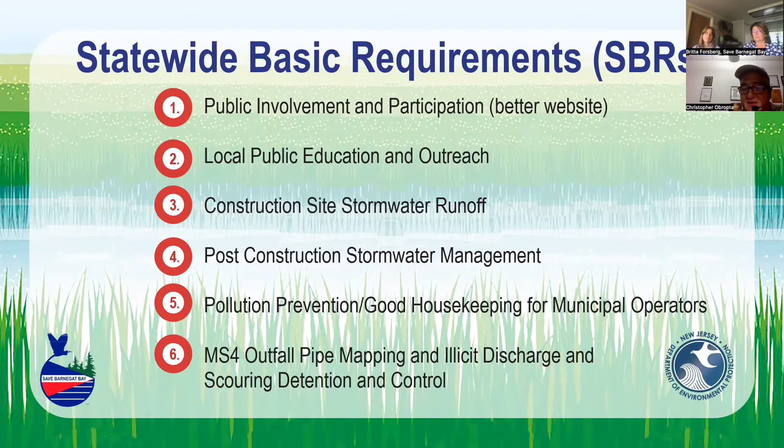These have not changed over from this year to next year. They really haven't added much to this. A lot of this stuff is pretty straightforward. We'll kind of go through some of these right now.

You're required to have a municipal stormwater webpage. This has gotten more intense basically with the new regulations that are coming out in January. They're looking for a dedicated webpage, and they have templates available from the department.

They want all these items posted on the webpage. You now have to post your MS4 infrastructure map, which is being required to be developed as part of the new permit that comes out in January, and this new thing called a Watershed Improvement Plan, which we'll talk a little bit about.

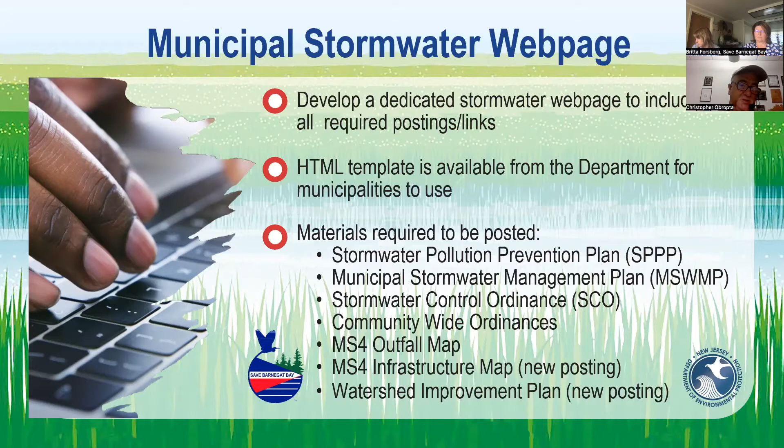So a lot of towns have a website, a web page attached to their municipal site, and it really just kind of talks about stormwater pollution. Now they want you to have posted clearly all these materials so they're easy to find. So that's really the public involvement and participation piece and public outreach piece.

The second piece here is public outreach and education, and this is interesting.

Most towns have a place that makes signs for them. We have Rutgers, and we have a web page with all examples of signs, so you can grab one of those PDFs, send it to the printer, and have it made. Pretty easy to do. Other things in this general public outreach category include billboard signage and murals, like people painting on the sides of buildings focused on stormwater. Then there's stormwater facility signage, not just for green infrastructure, but for your detention basins and other things you may have.

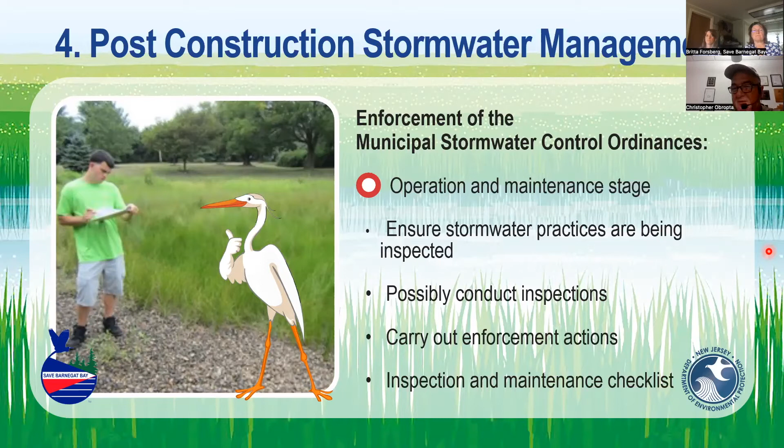So that's pretty straightforward. We have pollution prevention good housekeeping work, which focuses on what we do as a town. We have to pass existing ordinances and new ones, like a private salt storage ordinance. So if you're a homeowners association or a mall with your own salt pile, you have to show it's being stored properly so the salt isn't released into the environment. Then there's the tree removal replacement ordinance.

Towns are required to put in a tree ordinance if they don't have one. So if trees are cut down, you're required to replace them, and you need permission to remove them. These ordinances will be in the January 2023 permit requirement. DEP will have samples of these ordinances that you can download and adopt, or tailor for your own town.

A yard waste collection program has been in effect for a while. We've done a pretty good job of this as a town, really trying to make sure these leaves do not get into the river or the bay - trying to keep them at least 10 feet away from the inlets so you have a chance to clean them up before they wash in.

We also have pollution prevention good housekeeping measures for street sweeping - there's going to be a stronger requirement as we move forward next year. Catch basin and storm drain inlet inspection and cleaning has changed a bit too. Then there's inlet retrofit, which is putting a grate in front of the inlet so water bottles don't get in.

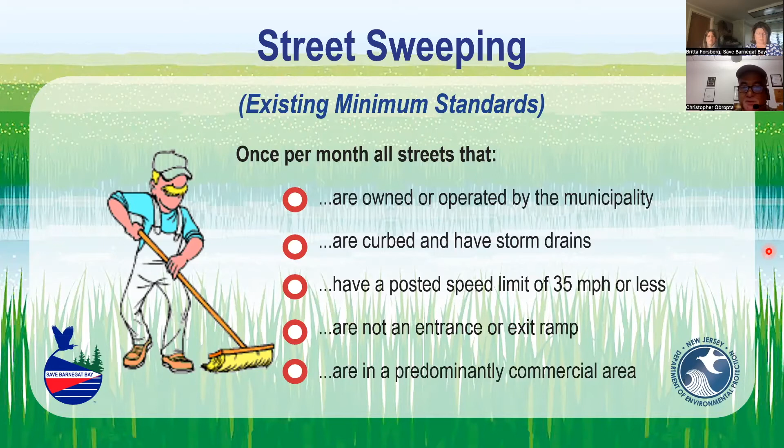A lot of you in towns have been doing a lot of street sweeping. I'm not sure if you even know these were the requirements, but these are what were required in the existing permit. Here's how they change effective January 1st.

There's triannual street sweeping now, so every 4 months instead of monthly, for street segments of municipal roads that have storm drain inlets discharging to surface waters. No criteria related to speed limits, commercial areas, exit or entrance ramps, or curbs. So basically you've got to do everything now, but just once every 4 months instead of monthly.

So annual sweeping every year for street segments of municipal roads that do not have storm drain inlets discharging to surface water. I'm not sure what roads those would be - most roads have inlets that ultimately discharge to surface waters, but you may have some that don't. Those you have to do once a year.

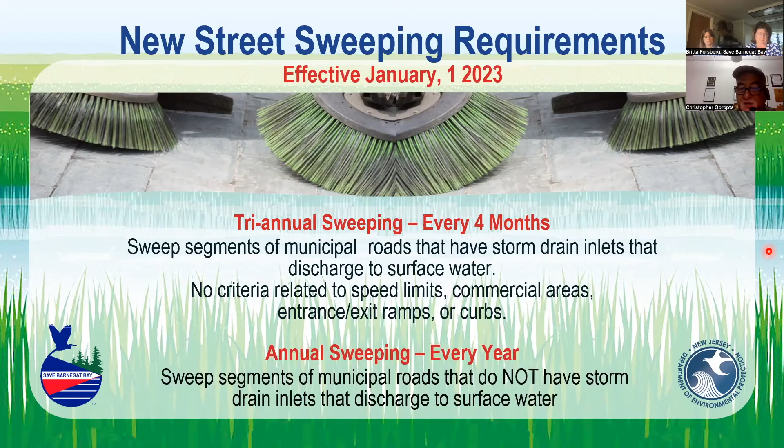Everything has a measurable goal with DEP. So the data you're supposed to be collecting - if you're the stormwater coordinator, this is important because you have to submit it every May with your submittal package showing you're complying with the regulations. That's data on area swept, number of miles of street swept, and amount of debris collected in tons. You have to quantify this, come up with a way to record it, and keep the records. This has always kind of been in effect, but I don't think many people have paid much attention to it - now we're getting pretty serious about it over the next permit cycle.

So catch basin and storm drain inlet inspection and cleaning - here's how DEP defines an inlet. The inlet is the grate in the road, on top of the catch basin. The catch basin is the concrete structure, the vault under the grate, where the stormwater goes after it passes through the grate.

So that's what they're talking about here. Inspect each catch basin and inlet at least once every 5 years.

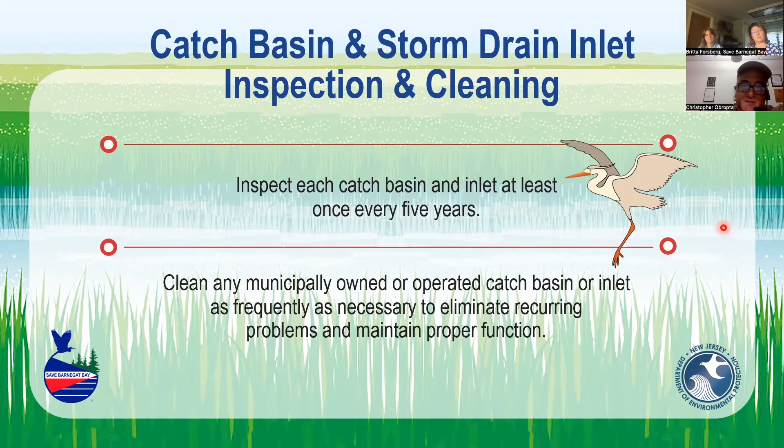So things tend to break on these a lot, so you have to be very careful about that. This is kind of the new regulation. So every storm drain inlet, so that's the grate on top, has to be inspected every year. A lot of that's just driving around and checking, what does it look like? Is it still there? Is it clogged?

If it's clogged, then obviously you have to go back and clean it out. Catch basins, if you have less than 1,000, you have to inspect them each year and clean the ones that have to be cleaned. Typically, if the catch basin has a third of it filled with sediment, you have to clean it out. If you have more than 1,000 catch basins, you have to do 20% of the total every year.

So I'm dealing with a town that has 10,000 catch basins. Every year they have to inspect 2,000 of them and clean the ones that need to be cleaned.

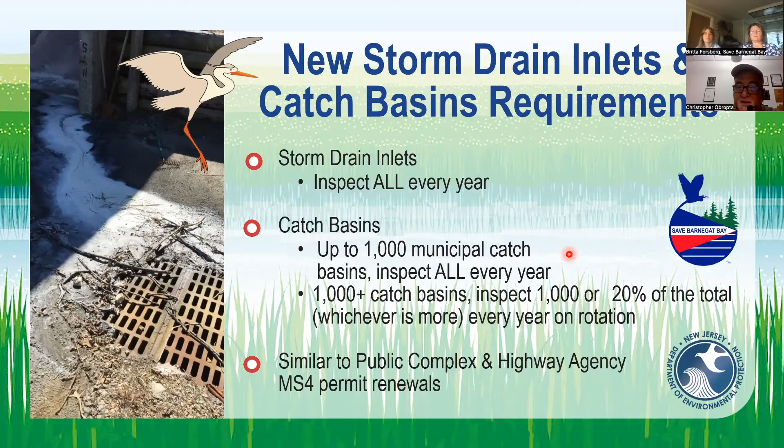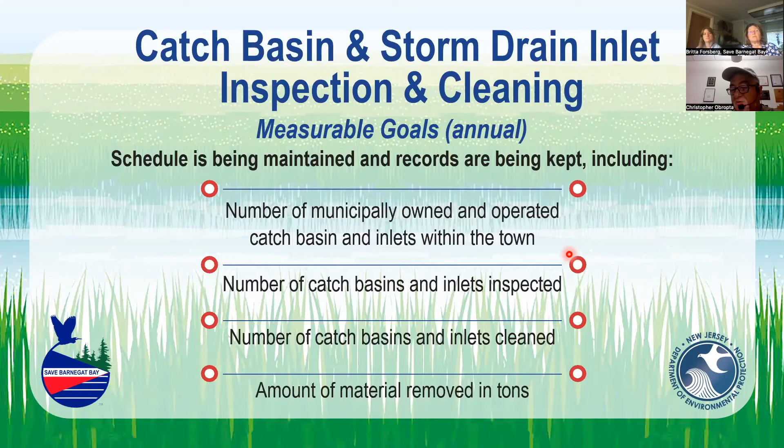Once again, keeping records is very important. How many inlets were inspected, how many catch basins were inspected, how many were cleaned, how much material was removed in tons. Once again, all this has to be recorded.

So the other thing they have in here is they're asking you to increase the frequency in problem areas. We find a lot of times that we go down a road and there's 5 or 6 catch basins on the east side of the road, and they all flow together. Water goes into one, it goes down to the next one, next one, next one. And the last 2 in the line are usually the worst in the system, so those usually get clogged the most and have to be cleaned out the most. So maybe you're doing those more often than the other 3. This allows you to do that under this permit.

Okay, perform inspections after major storms. Passing an ordinance to require private entities to maintain storm facilities and take over private facilities. So, here's the option in the towns. Every single catch basin has to be inspected and cleaned on a regular basis.

Now, there's catch basins at the mall that you don't own. There's catch basins maybe in a private housing development that you don't own. You have to ensure that those are also being cleaned and inspected. You do that by passing an ordinance. The other way is to take over those private facilities and have the township or municipality take over ownership and take care of those.

So those are really your 2 options. I would imagine the second option is probably not one that a lot of people want to do. It's much easier to pass an ordinance and require the homeowner association or the mall to submit an annual report saying that they've been cleaned and inspected.

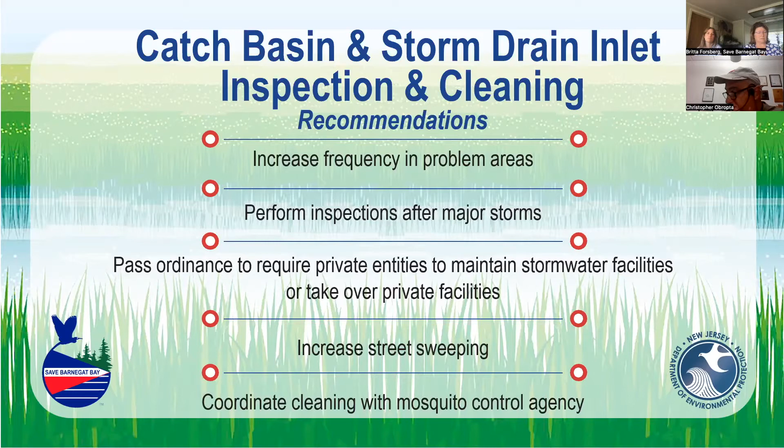The other thing they have on here is coordinate with the mosquito control agency. They're doing a lot of work anyway to make sure there's no standing water in some of these basins that breed mosquitoes, so maybe there's a way to work more closely with them. Remember, they're a county agency in most cases, so it might be hard for 30 some municipalities in Ocean County to coordinate with them, but it may be worthwhile looking into. They may have assistance.

The other thing is to retrofit these inlets. I don't know where I stole this picture from, but I'd like it. I think it might actually be from DEP's presentation. So municipalities shall retrofit existing inlets that are in direct contact with repaving, repair, excluding pothole repair, resurfacing, or in direct contact with any reconstruction or alteration facilities. So that's the existing standard.

So where the raccoons' heads are sticking out, you're supposed to put a steel bar in front of that, so water bottles and soda bottles can't get into there. And that was what the main retrofit was. And you only had to do it when you were repaving or repairing a road, resurfacing a road.

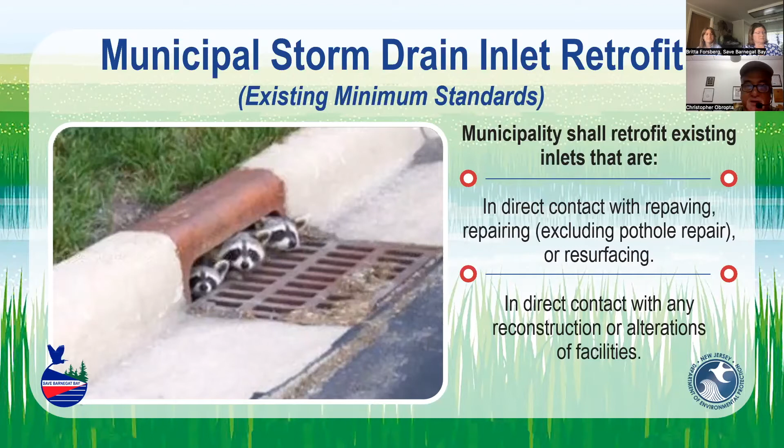So you didn't have to go around systematically replacing them until January 1st of 2023. Now you have to do that. So you have to go in, change this lid out and replace it so water bottles can't get in there. And you have to do that for every single storm drain you have in a town.

Okay, so you can bolt it on. There's a bar you can get here and just bolt on the bar, or you can just replace the grate. And then they have to be with the DOT bicycle safety grates, so that when a bicycle drives over this, the person doesn't go over the handlebars, get caught. That's part of the requirement.

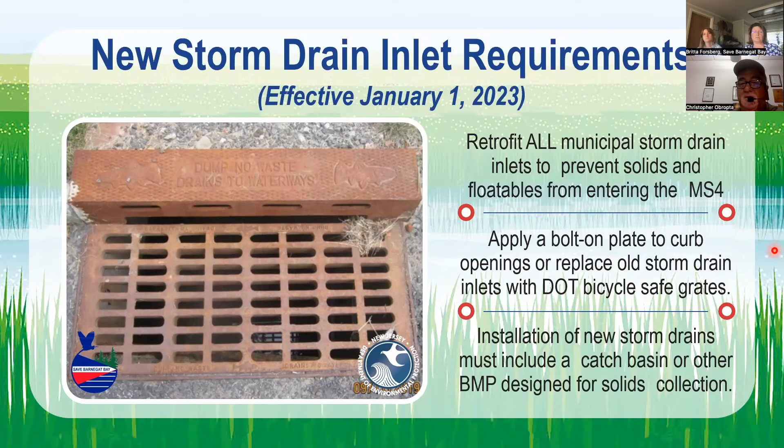So this is all kind of spelled out in the new permit. So this could be a huge expense for the town. Okay, so something to kind of think about as you're budgeting for the next few years.

The other thing is, they want you also to make sure that you identify all your stormwater conveyance features, your ditches and pipes, and inspect, clean, and maintain them as needed. So this is new, you start thinking about inspecting all your stormwater pipes. That could be very expensive too. And cleaning them even more expensive, right? So these are things that you'll see coming out in a new permit.

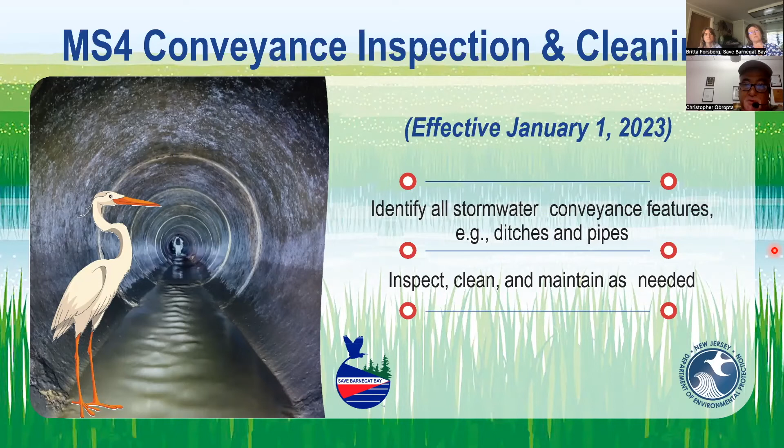Good housekeeping procedures. This is the fifth of the stormwater pollution prevention mandatory requirements. So we talk a lot about the maintenance yard. This is a place that typically when DEP comes out and does their audits, they will inspect the maintenance yard. They want to make sure your fueling operations are up to code.

You have a secondary containment for any time there might be a fuel spill or diesel spill. The vehicle maintenance is being done inside a garage and not out in the open, so any kind of oil or fuel that might be leaking from the vehicles is contained. And then the on-site equipment washing is in a contained area, so you're not washing oil and mud and grease off vehicles that's going into the storm sewer.

Once again, salt and de-icing material storage - everybody probably has that in place already. Aggregate material, construction debris storage - a lot of folks have this in place already, whether it's in a walled-in area with a tarp on it, or just a walled-in area that won't allow it to wash away.

Street sweeping and catch basin clean out, other material storage. A lot of folks are just putting this in dumpsters and then hauling it away. So where you keep that is important, because you don't want that washing away from the yard into some other place.

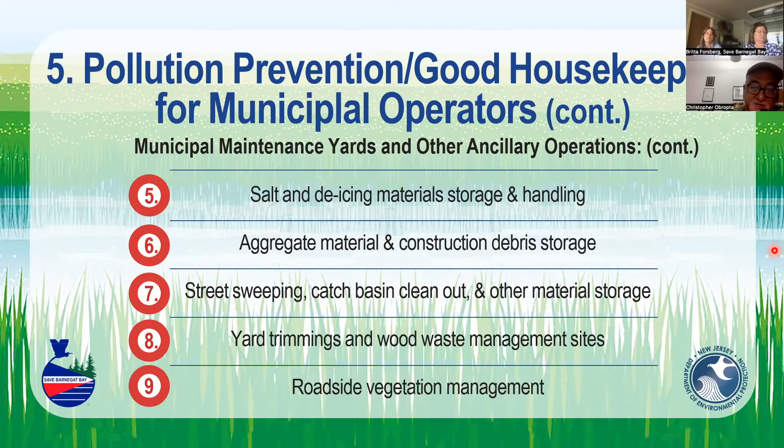And yard trimmings and wood waste management sites and roadside vegetation management. So these are things that we worry about. We'll talk a little bit more about some of these.

So fueling operations, minimum standards kind of here. I had in here, I actually was looking at Woodbridge's pollution prevention plan, and they have that they inspect all fueling areas on a monthly basis. I think that's a great idea to put that in there, and that could be like a 2-minute inspection, walking around, everything looks good, write it down. It was inspected the first of the month by so-and-so, and we did our monthly inspection, right?

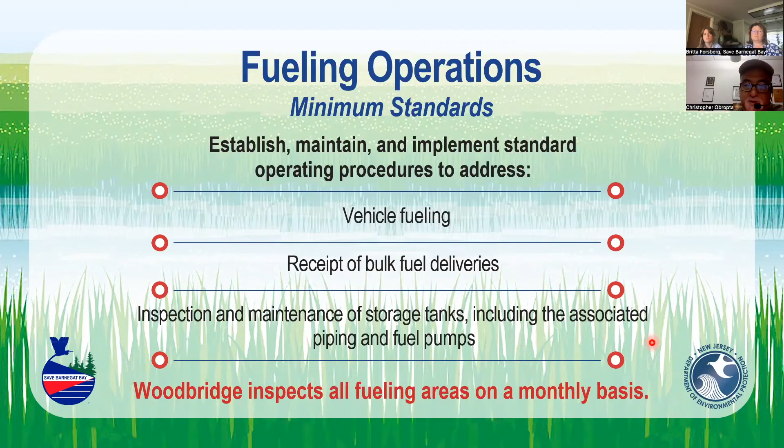Receipts of bulk fuel deliveries is important to have, so what's on site, and inspection and maintenance of storage tanks, including associated piping and fuel pumps. So when you're inspecting, you really want to make sure that the tanks aren't leaking. Most of the times you're using this stuff on a daily basis. If there's a problem, you report the problem, you fix it. But DEP wants some sort of documentation that you're doing regular inspections of this, right?

Secondary containment they want you to have. So in case something breaks, a diesel tank breaks, where's that diesel going to go? So you need a secondary containment area for that. Any discharge in that secondary containment area, you have to make sure that there's valves in place so it doesn't get discharged into the environment. So this is all pretty standard procedures that you probably all have in place already.

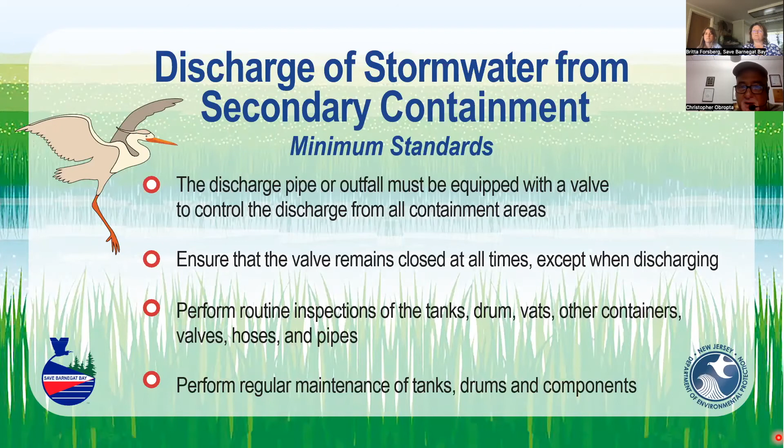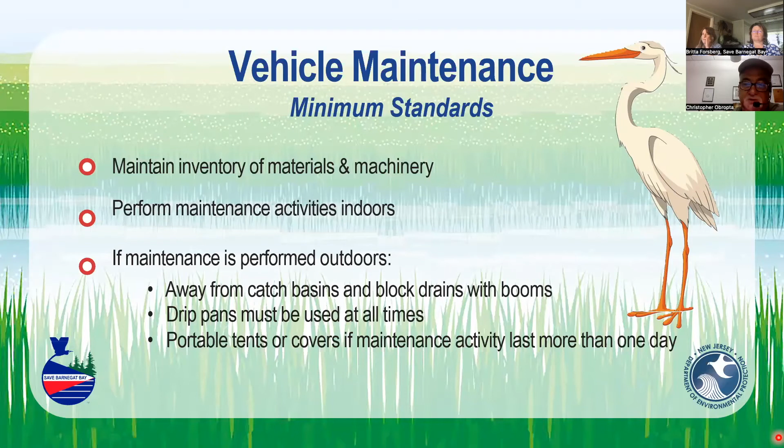So really, if you're working outside trying to fix the vehicles, they want to make sure that there's no impact to the environment. That's pretty easy to do.

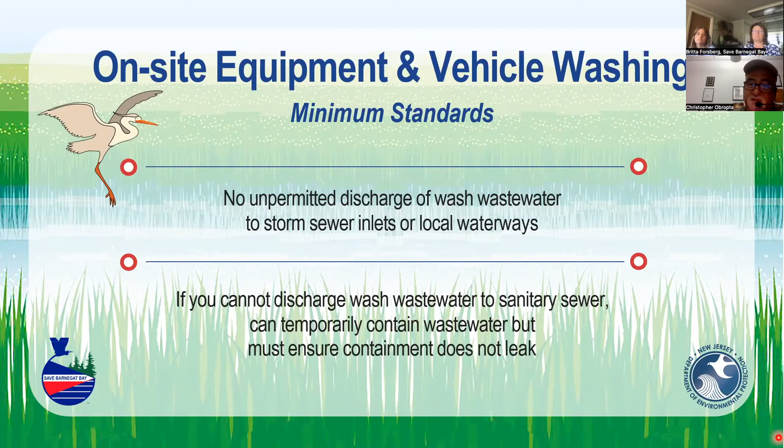Okay, salt and de-icing materials. This is a big problem that we've had for a long time in New Jersey, one that I think we've done a great job of managing by building salt sheds to make sure the salt is not washed away. The bigger issue is when we're using the salt in a storm, making sure we're cleaning up after it and sweeping the salt back into the salt shed, not letting it get away.

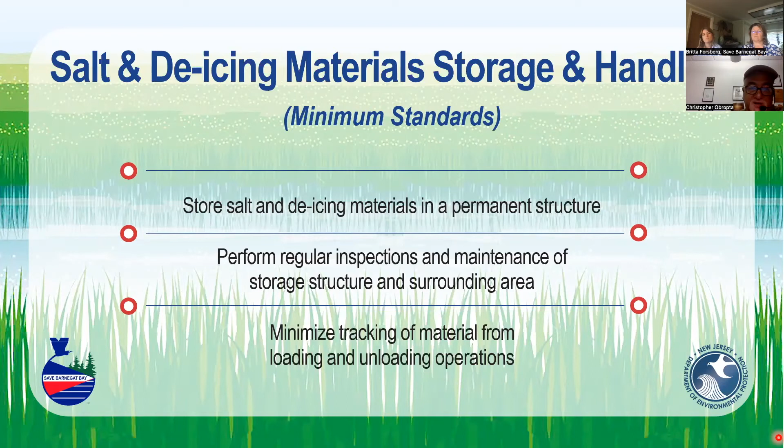I don't know how many of you guys are going to be able to do that, but keep in mind your guys were just out for 48 hours without sleeping, plowing and salting, and now you need to go out within the next couple of days and clean up those salt piles. So this is going to involve a lot of overtime, time and a half. And we know in New Jersey it only snows on Sundays on a holiday, so it's triple time or something like that.

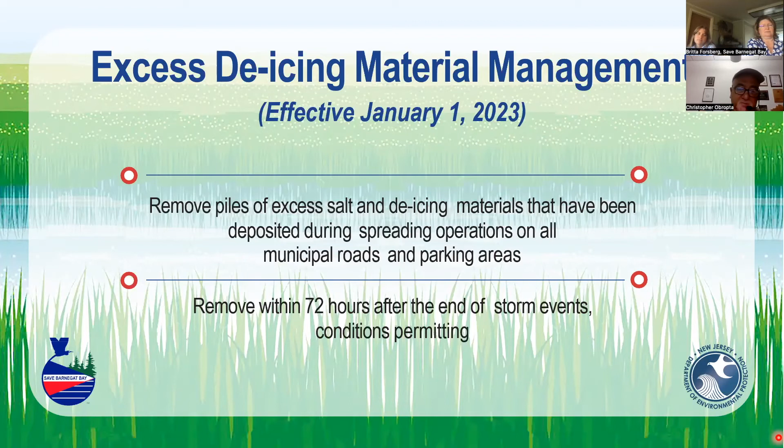So anyway, you have to be worried about this. This is something they had in the original permit 5 years ago, and they pulled it out. Now it's back once again in this new round of permitting. And more on this stuff.

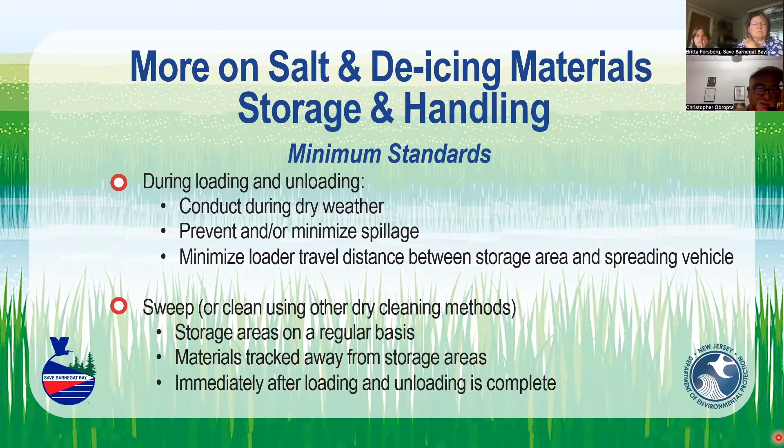During loading and unloading, conducted during dry weather: prevent and minimize spillage, minimize loader travel between storage area and spreading vehicle, sweep up debris from storage areas immediately after loading and unloading is completed. So really trying to keep the salt where it's supposed to be and not let it out into the environment. Reuse or properly discard materials collected during cleanup.

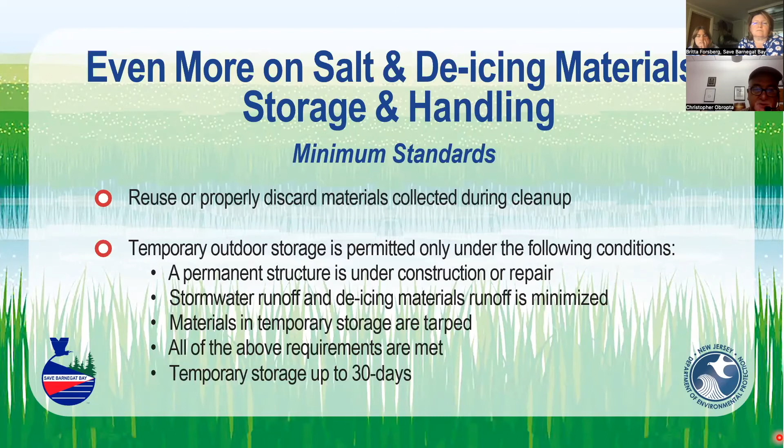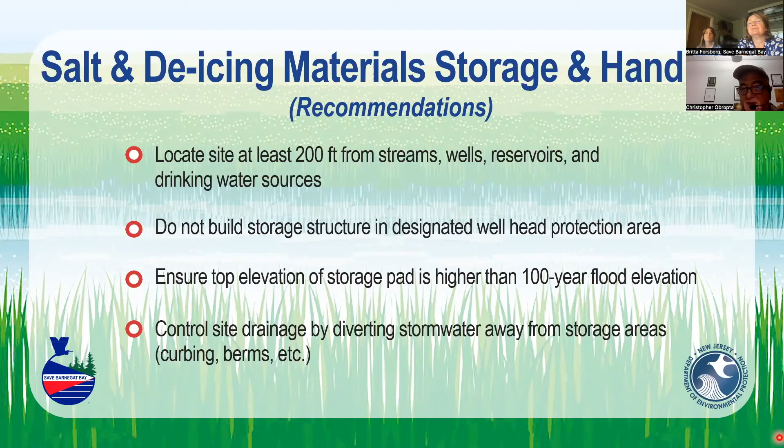My experience with shared services, it's very difficult to do. Some towns do a great job of it. Other towns really would rather just manage things on their own.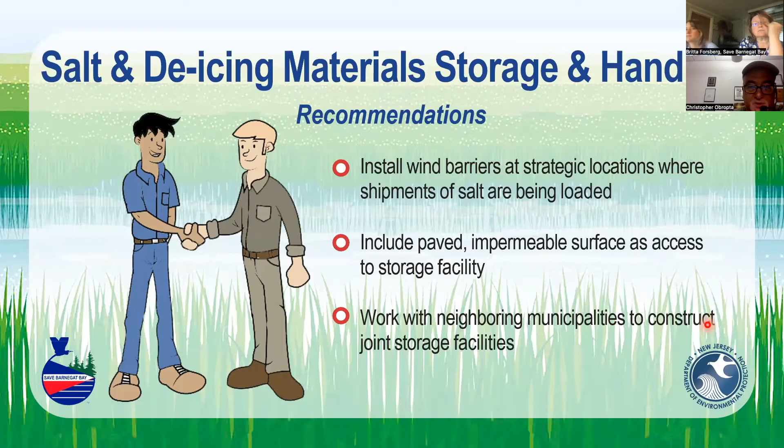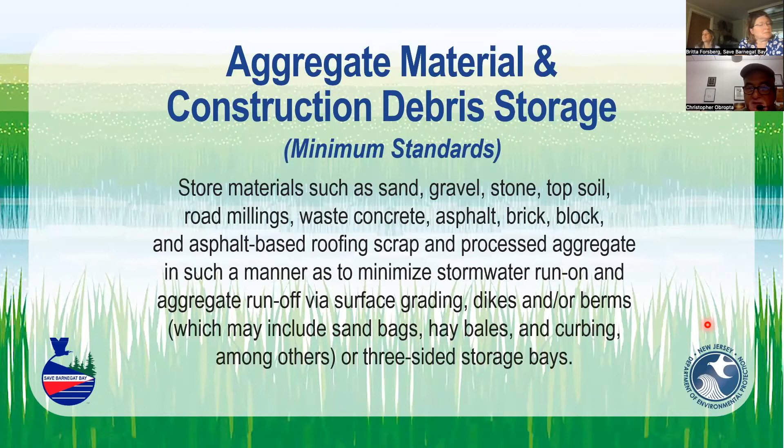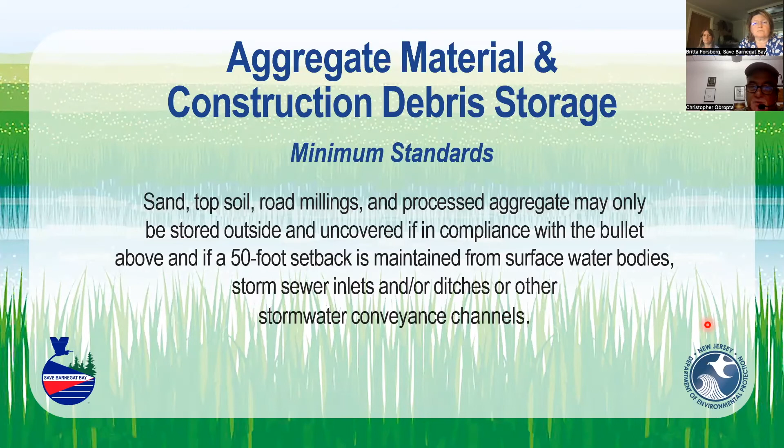Then we have some similar things for aggregate and construction debris—once again, storing it so it doesn't get off site. We have some minimum standards: sand, topsoil, road millings, at least 50 feet from water bodies, or stormwater inlets or ditches. So this is pretty important.

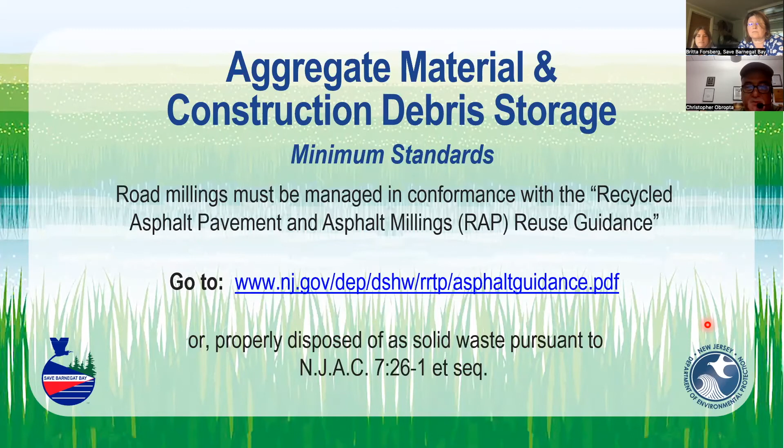And they have some other stuff in here about millings and guidance on that. I think we'll make this presentation available to you guys after this—it'll be on the website along with this recording. So once again, this is more about aggregate storage, and they talk a little bit about what DEP wants.

When we clean out the catch basins or do street sweeping, we must dispose of this appropriately. There's guidance for that, and you need to make sure you're complying with it. Road cleanup materials must be stored in leak-proof containers or on an impervious, bermed surface to control leachate or litter, and removed for disposal within 6 months of placement into storage. So you can store catch basin cleanings or street sweepings on site for up to 6 months before you have to haul it away.

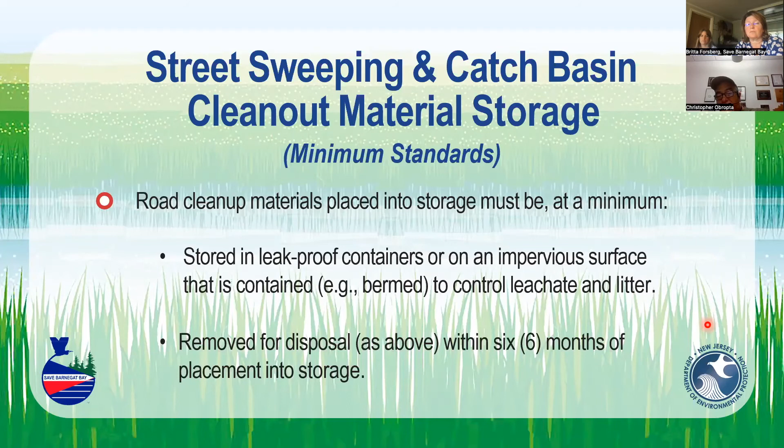A lot of guys just dump it into a dumpster and then have the dumpster hauled away. That's another added expense for the municipality, right?

Yard trimmings and wood waste management sites. A lot of people have to keep yard trimmings in their DPW yards. A lot of towns have a common recycling place where they take things. So you just have to be careful about what you're doing when you're storing it in your yard.

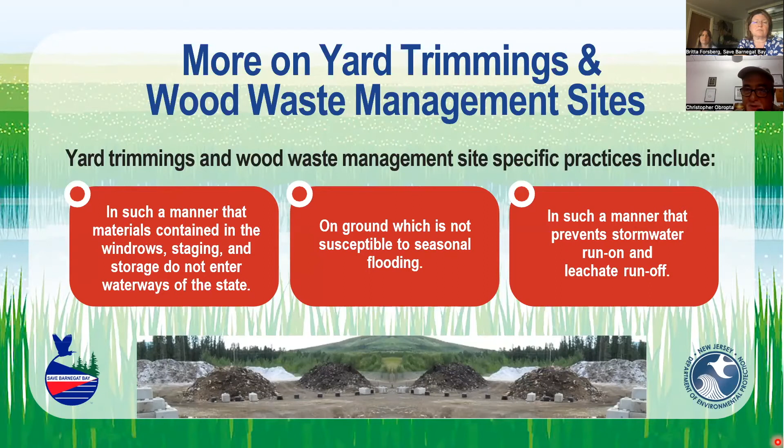It talks a little bit about composting it. You can't put it in a floodplain, and you want to prevent stormwater from running off of it or into the piles, preventing on-site storm drain inlets from siltation using controls such as hay bales, silt fence, and fabric. So if that stuff is being stored in a yard and there are inlets around it, you need to put inlet protection around it, so if stuff does wash near that inlet, it doesn't get in. But if you're smart, you're berming around it, so you don't have to worry too much about that.

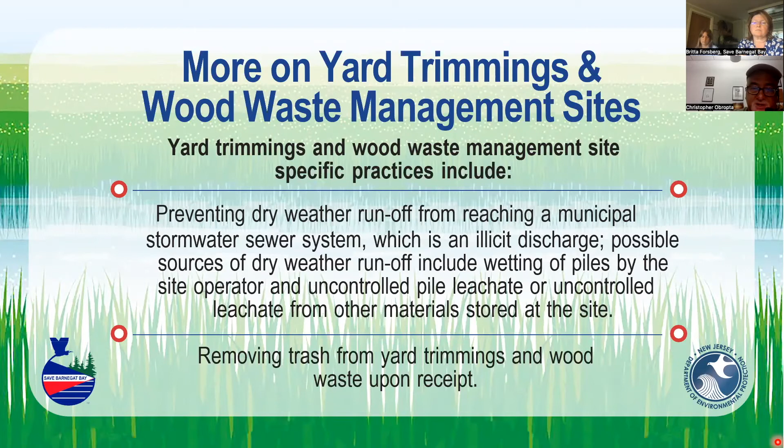Preventing dry weather runoff from reaching a municipal storm sewer, which is an illicit discharge. In other words, as this stuff is decomposing, it's leaching out liquid, and you want to make sure that leachate doesn't get into the stormwater system. And removing trash from yard trimmings and waste upon receipt, monitoring the site for trash on a routine basis, storing trash in leak-proof containers or on impervious surfaces, disposing of collected trash, and making sure that doesn't get out into the environment.

So roadside vegetation management, this is something they've changed a little bit. You weren't allowed to apply herbicides on or adjacent to stormwater inlets, on steep sloping ground, along curb lines, or along unobstructed shoulders. Municipalities may only apply herbicides within a 2-foot radius of surrounding structures where overgrowth is present.

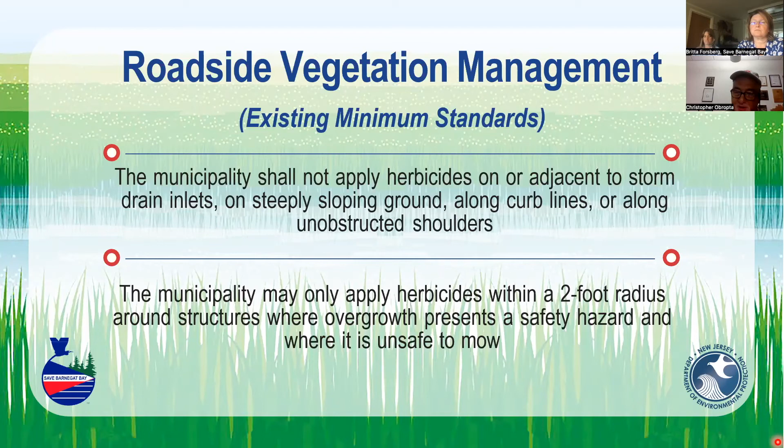A lot of towns will drive down the road with their DPW truck, and the guy will hang out the window and spray the vegetation around the guardrail. So this is kind of what we're talking about here. The new restrictions start January 1st: application of herbicides to prevent them from being washed into waters of the state, and to prevent erosion by devegetation.

So this is previous the roadside vegetation management. You have to be more careful to make sure, one, you're not spraying chemicals anywhere near waterways or inlets, and two, when you're killing the vegetation, you're not creating an erosion problem that's going to cause sediment to wash into the waterways.

So stormwater maintenance facilities, this is a big thing we've been worried about the past couple of years. Anything owned and operated by the town must be inspected annually and ensured it's working properly. Anything privately owned, by a homeowner association or one of the malls or things like that, also has to be inspected annually, and you as a township must certify that they were inspected.

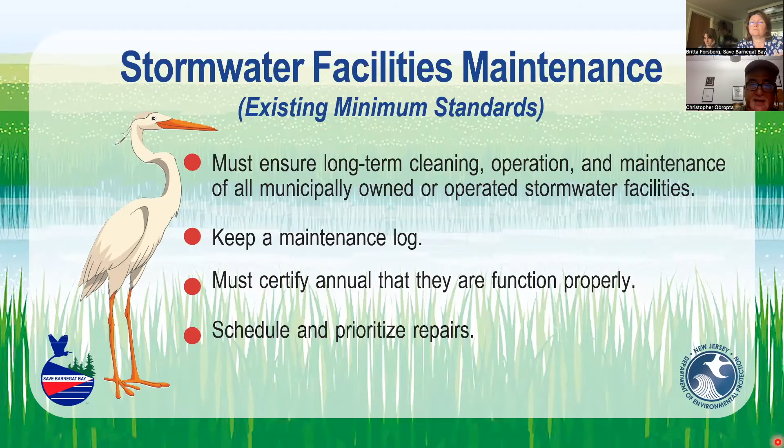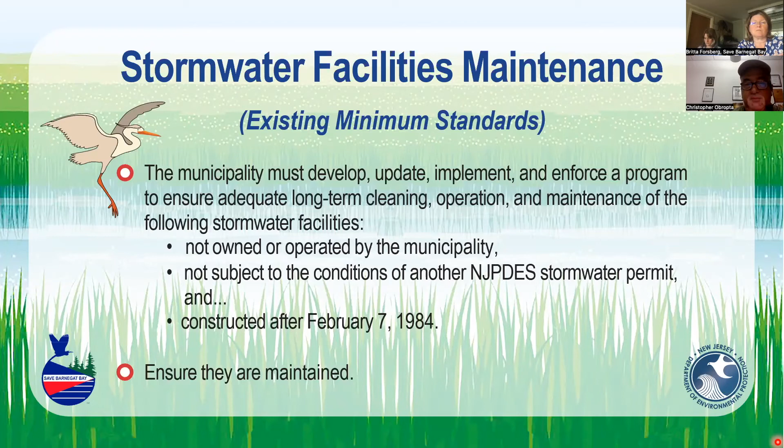Most people pass an ordinance requiring those places to have a stormwater engineer inspect their facility and file a report annually. That usually costs the homeowner association anywhere from $400 to about $700, from what I've seen. So it is an expense on their part, but they have to do it. If they don't, you as a township could issue fines to make sure that happens. You have to ensure that they're being maintained. The new regulations identify any MS4 infrastructure that does not already have a specific permit condition.

For example, stormwater management basins, inspect at least 4 times annually and clean and maintain as necessary.

Now there's a caveat to this. If your stormwater basin has a maintenance plan, and that maintenance plan has something different than an annual inspection of 4 times a year, maybe your plan says inspect once a year, you're supposed to follow what's in the approved maintenance plan. So if you have a stormwater detention basin in your town with a maintenance plan that says inspect annually, then you inspect it annually as per the maintenance plan. If you don't have a maintenance plan, then you're required to inspect it 4 times a year and clean and maintain it as necessary.

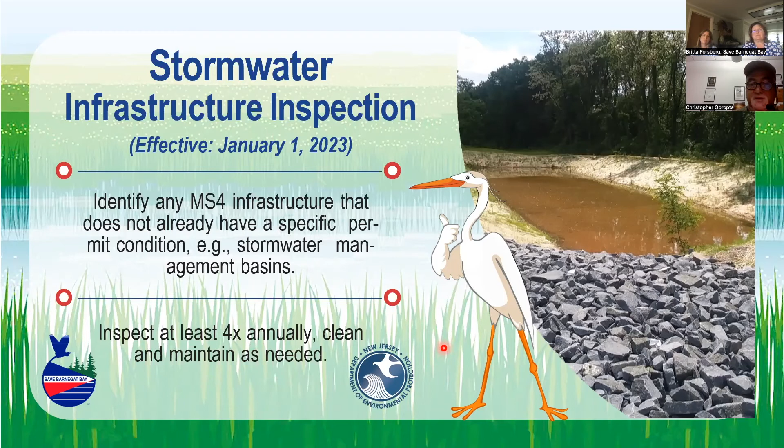So for me, that would make me want to write maintenance plans for all my stormwater infrastructure. That's one way to do this. Maybe some of these do need to be inspected more than once a year, but certainly something to think about. All these facilities should have a maintenance plan anyway. A lot of them don't because they were built a long time ago, but it might be worthwhile going in and creating maintenance plans specifically for each facility.

Ones that are not owned and operated by the towns still have to also be inspected and maintained. One way to do that is to pass an ordinance and make private homeowners associations do that.

Problem is, some of these basins are on individual properties. When we did this, back when I was part of a consulting company in the 80s, what we wound up doing was have a 2-acre lot instead of a 1-acre lot, so the homeowner would get the 2-acre lot with all this open space attached to it, which was the detention basin. Now that homeowner is responsible for maintaining that detention basin, and they're not too happy about it. So that's something to be a little bit aware of, you'll see pushback from that.

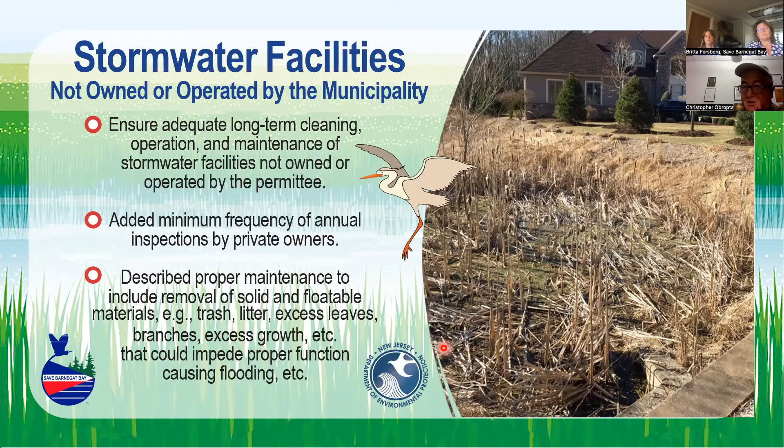So Woodbridge uses their public works department to do roadside erosion control. I talked to him a little bit about this, and I like this procedure. You're supposed to identify if there's any roadside erosion along the road, and you need to do these regular inspections.

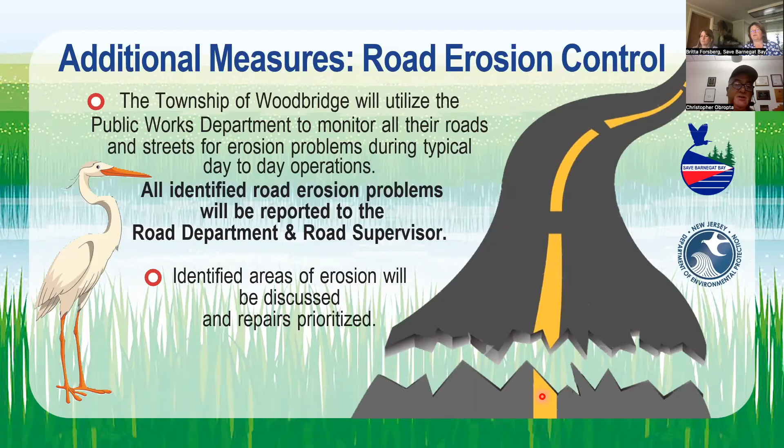Now, one way to do that is to simply train your public works guys on what to look for, and then when they're out there on their day-to-day work, if they see something, they report it. You record it and put it in a report, then schedule time to go back and inspect it and maybe make repairs if necessary. This is a way to avoid having a whole other inspection routine, which is something to try to avoid.

So here they want you to check the shoulders, the embankments, ditches, and like I said, this can be done in tandem with other municipal inspections.

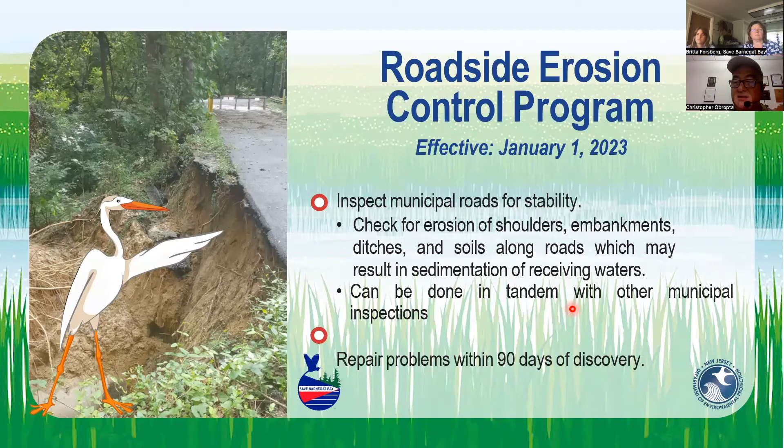I don't like this last bullet, repair problems within 90 days of discovery. That might be hard in some cases, you may need an emergency permit from DEP to make the repair. But the goal is to try to get it fixed quickly. If you can't get it done in 90 days, then you probably should have a report of why you couldn't get it done in 90 days.

Employee training. This really hasn't changed much. You need to be trained. Employees should be trained on best management practices. The municipal boards and governing boards should be trained, so your planning board, zoning board, board of adjustments, township committee, and environmental commission should all be trained on stormwater issues. Anybody who's reviewing designs has to have special training for that and be certified to do so.

Stream scouring. This has always been part of the regulations. Inspect the outfall once every 5 years.

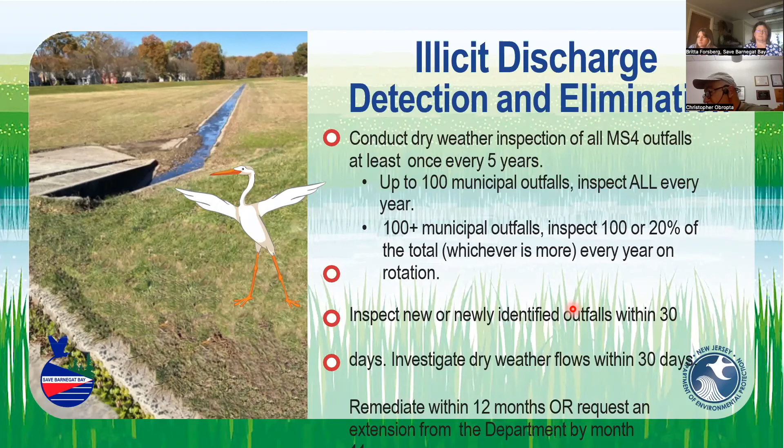They want you to make sure you have a system in place. Once you inspect outfalls and find scouring, you're supposed to try to fix that within 30 days or remediate within 12 months, depending on what's going on. So when you see scouring from an outfall, you've got to inspect it and fix it. Any outfalls flowing during dry weather will certainly have some issues—it may be an illicit connection, or it may just be groundwater influent infiltrating into the stormwater pipe. So if you have a stormwater outflow flowing and it hasn't rained in 3 days, you need to test it. There's a whole protocol for that.

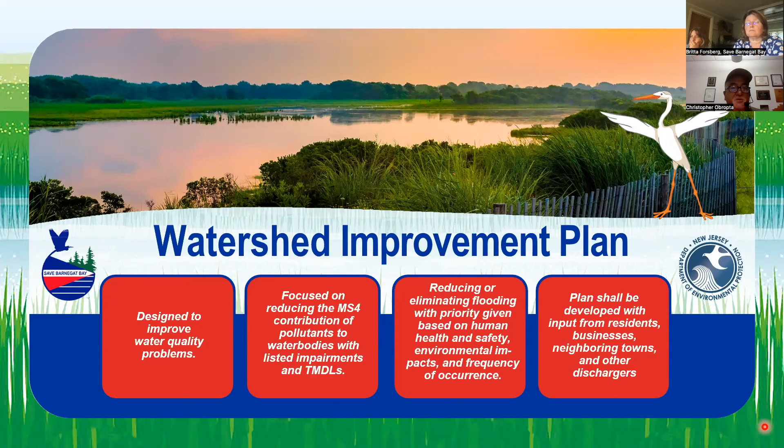The last thing is this watershed improvement plan. This is something new—all towns will be required to do one. It's designed to improve water quality problems, focusing on MS4 contributions to water body impairments and TMDL impairments, and reducing or eliminating flooding, thinking about human health and the environment. The plan shall be developed with input from residents, businesses, neighboring towns, and other dischargers. This is DEP's attempt to get you to look at past problems, identify areas with no stormwater management, and find opportunities to retrofit it with stormwater management. They have different phases here.

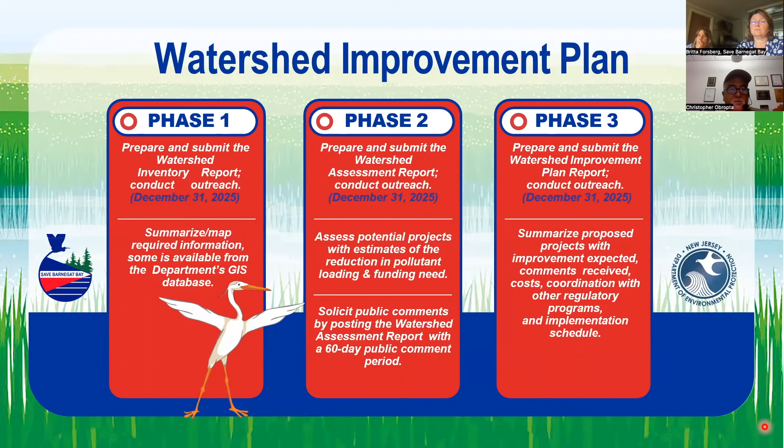By the end of 2025, you need to have prepared and submitted a watershed inventory report. By the end of that same year, you need to have conducted, prepared, and submitted a watershed assessment report. And then you also need to have a watershed improvement plan. So those are the three things you need. I don't know if those dates are exactly right, but I could check that for you.

I don't mean to be an alarmist, but for those of you who have been doing business as usual with your MS4 system, you really need to download the draft of the permit coming out in January and review it, because there's a lot being added, and some of it may be big budget ticket items. So if you're thinking about next year's budget and who you need to hire, now is the time to be doing that. If you have any questions, you can always call DEP, or call me, or call Steve Souza—we can talk you through some of it. But the way it's looking right now, the requirements are going to certainly be more intense than they were in past years.

That's it, Britt. I'm done. Can I go to lunch now?

Thank you very much, Chris. I want to follow up with a couple of questions or comments from folks online, and also share a new tool we developed. I think a lot of the folks from towns would like to see this, and maybe you would too, Chris, as part of this project.

Right, so how can I do that really quick, Avery? I pulled it up already. Oh. So we'll share the screen here.

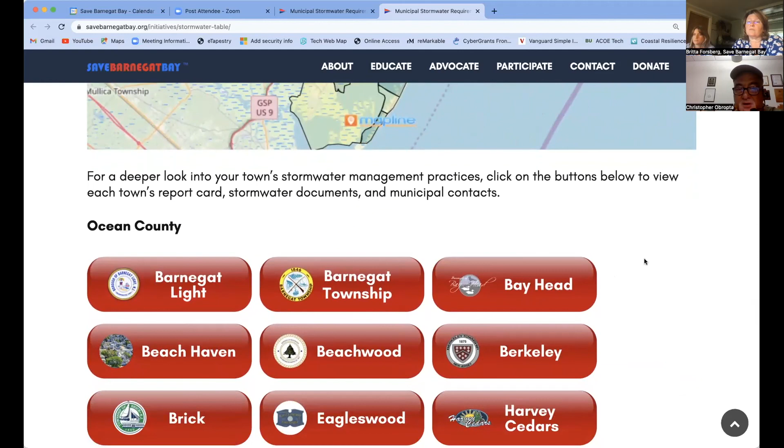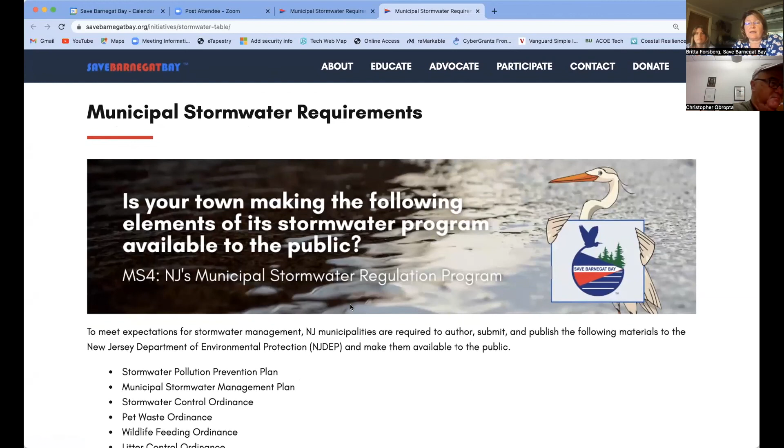This is our new landing site, which you can go to on the Save Barnegat Bay website, to this Advocate tab, and then over to a box called Municipal Stormwater Requirements. We developed a public-facing report card and the criteria. All the towns in Ocean County, of which there are 33, and 4 Monmouth County towns that have a portion of their land draining to Barnegat Bay — here's how we developed this criteria.

If you're online here and see your town and think we're just missing something, please send it over and we will update this. We would obviously like all the towns that drain to Barnegat Bay to be in the A column, and we're not that far off. The towns that are out of compliance have a few little housekeeping things to do. I think for the Barnegat Bay Watershed, we'd love to achieve those things by the end of this year, so we can walk away from this grant program saying our watershed is completely compliant with the stormwater rules.

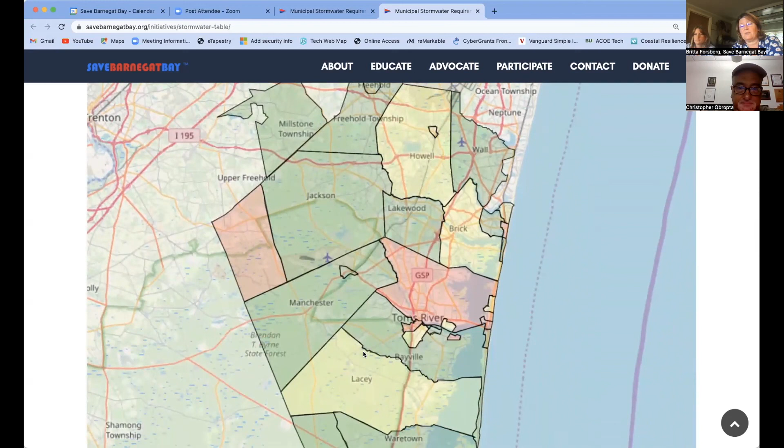Here's a visual map one of our interns made, just to give you an idea where we're at. Then for each town you have a tab — so we could just pick Barnegat Light, and it'll take you to your report card and a checklist of all the ordinances required, your stormwater management, pollution prevention plan, and the documents in linkable tabs. If we looked at ordinances, you could go to your town and see all the ordinances required and the links to where they're available online.